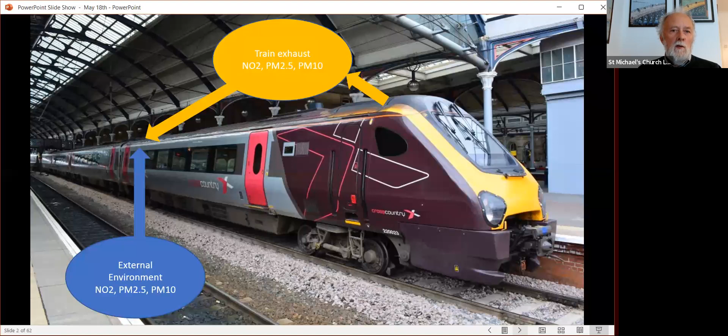If we consider a train and the pollutants around it, obviously it takes in external pollutants from the environment, and the ones of interest are nitrogen dioxide and particulate matter, usually defined as particulate matter less than 2.5 or less than 10 microns. So that goes into the air conditioning system. It also produces its own exhaust, similarly NO2, PM2.5 and PM10, which can again be entrained into the air conditioning system. So this set of pollutants comes into the cabin, where it's joined by pollutants from people.

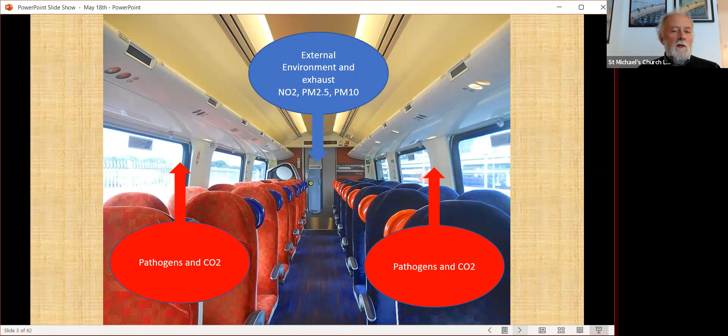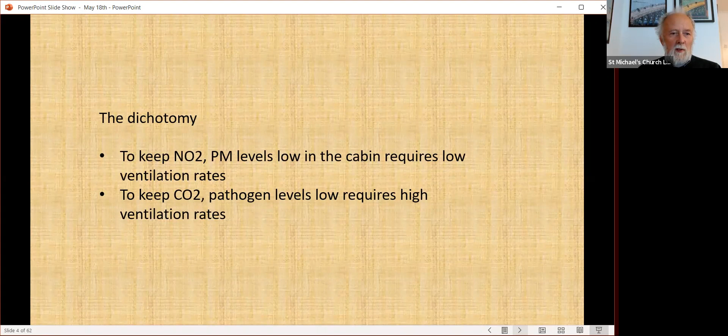These are mainly CO2 from the breathing process, but also pathogens, potentially during any time of infection. And of course there's a dichotomy here: to keep pollutant rates low in the cabin requires low ventilation rates to stop them coming in from outside, but to keep CO2 and pathogen levels low requires high ventilation rates. So there's something of a contradiction, and that's largely what I want to talk about in what follows.

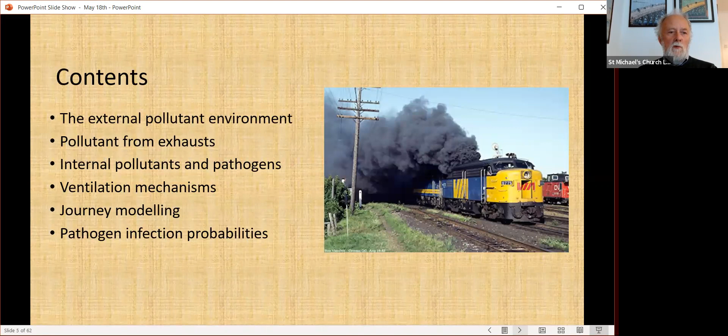I'll talk first of all about the external pollutant environment, then about pollutants from exhausts, then about internal pollutants and pathogens, ventilation mechanisms, journey modelling, and finally look at pathogen infection probabilities.

So, the external pollution environment. This is by way of background. The pollutants of concern, as I've said, are the oxides of nitrogen, particulate matter PM10 and PM2.5. The areas of concern are in enclosed stations where levels of those pollutants can be high, or in inner city areas, or in tunnels.

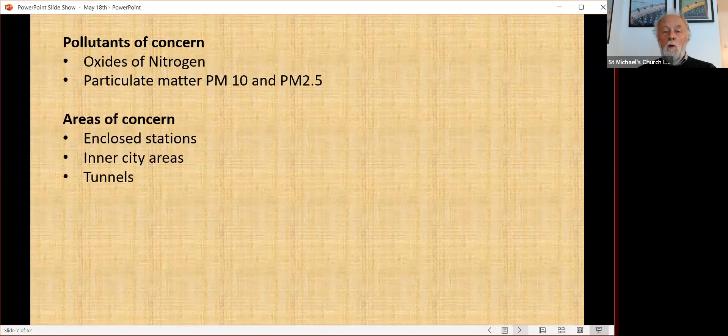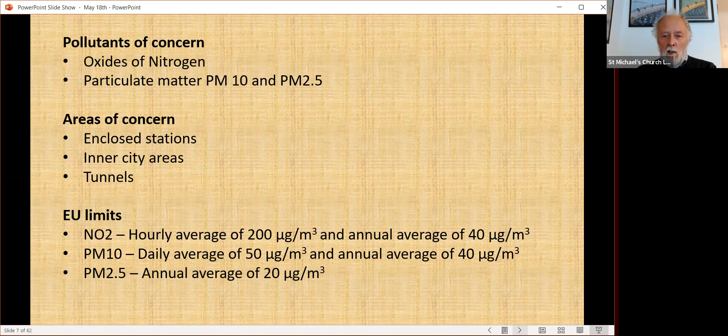For information, the current EU limits on these pollutants, which don't apply to the transport industry at all but are indicative: the hourly average of NO2 shouldn't exceed 200 micrograms per meter cubed more than a certain number of times in a year, and the annual average shouldn't exceed 40 micrograms per meter cubed. For PM10, the daily average is 50 micrograms per meter cubed with an annual average of 40, and for PM2.5, an annual average of 20. Keep those figures in mind, as they'll give context to what follows.

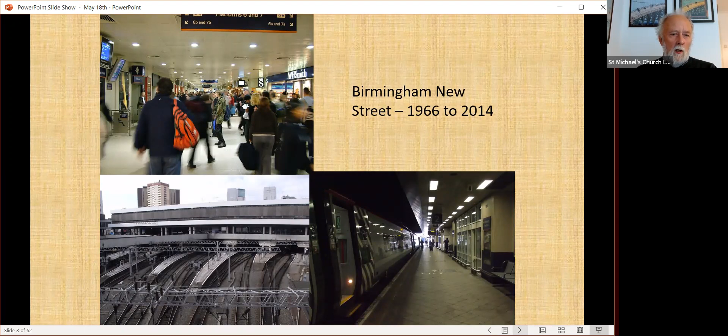Thinking about external pollutants, we did some work in 2016 at Birmingham New Street station, which was rather a dark and depressing station in its old format up to 2014, before it was replaced by the new station. Network Rail and the University of Birmingham took the opportunity to make pollutant measurements at platform level at that time. These have been widely reported, so I'm not going to talk in detail about them.

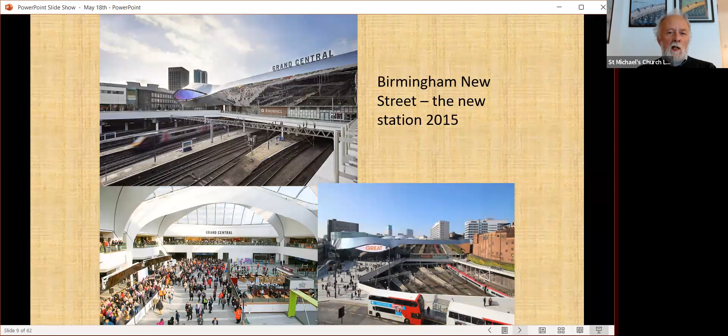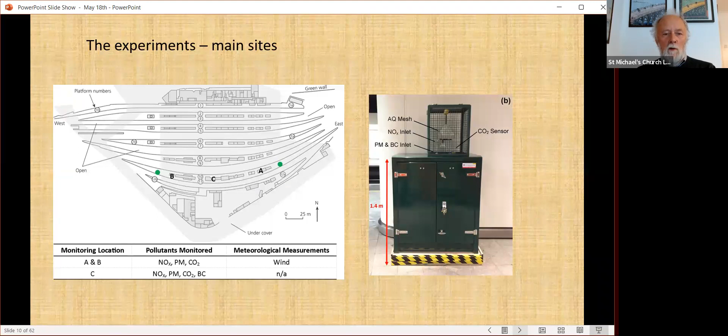In essence, we made detailed measurements of NO2 and particulates at a number of sensors along one of the platforms, as well as wider measurements across the station. I plot here the concentrations of nitrogen dioxide and the particulates across the course of the measurements at the end of 2016, start of 2017.

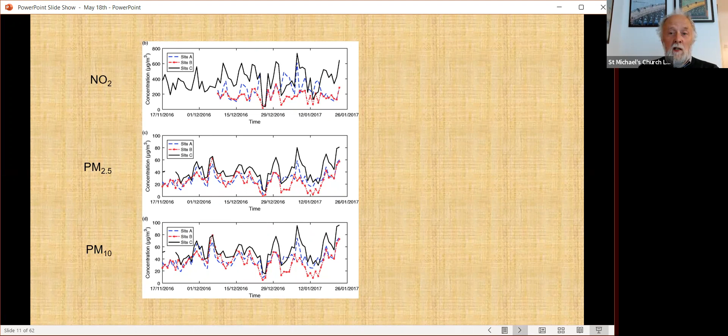If you think about those limits I just talked about, 200 micrograms per meter cubed for NO2 and between 20 and 50 for PM10, you can see they are quite significantly exceeded for many periods during the measurement period. Some interesting points on that graph, where I've just shown the shading, is the Christmas period when there are no trains, and you can see pollutant levels go very low.

Similarly, a period in January 2017, there was quite a significant wind blowing through the station. The highest levels were, frustratingly, just as we were packing up the equipment, in a period of almost no wind conditions. So even in a fairly enclosed station such as Birmingham New Street, there were significant meteorological effects.

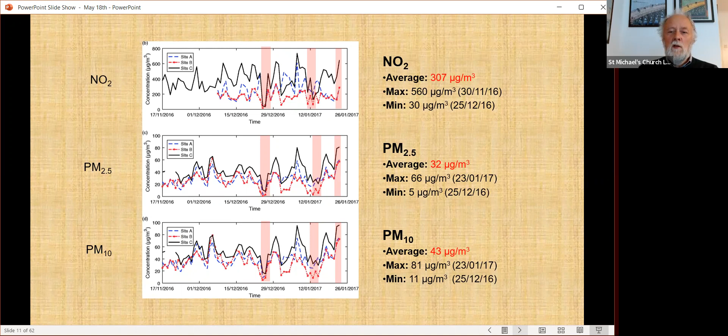We also looked in more detail at the effect of different trains on the platform, and here are minute averages shown for the nitrogen dioxide pollutant during the course of one day, when the presence or otherwise of various types of diesel train is indicated. There's not really much correlation between the actual train in the platform and the overall pollutant levels. The pollutant seems to mix very rapidly within the station.

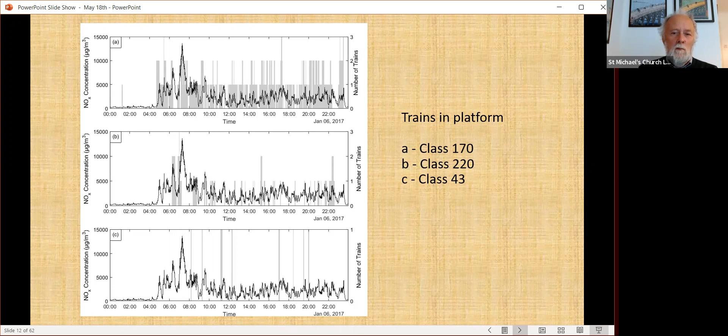On the basis of this study, further work was done by the Rail Safety and Standards Board through King's College London, who measured pollutant levels in Edinburgh Waverley Station and London King's Cross as well. Those pollutant levels are shown on the x-axis of those graphs for the three stations, and the red lines show the limits. Birmingham New Street, in its old incarnation, can be seen to be worse than the others, although nitrogen dioxide levels are actually exceeded at the other stations as well.

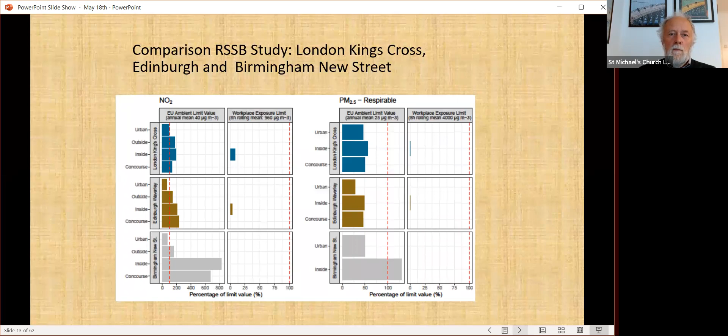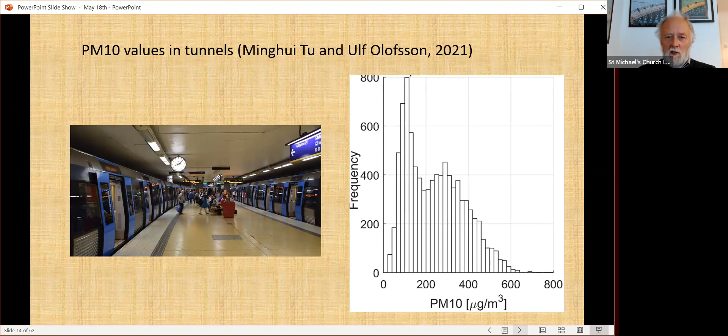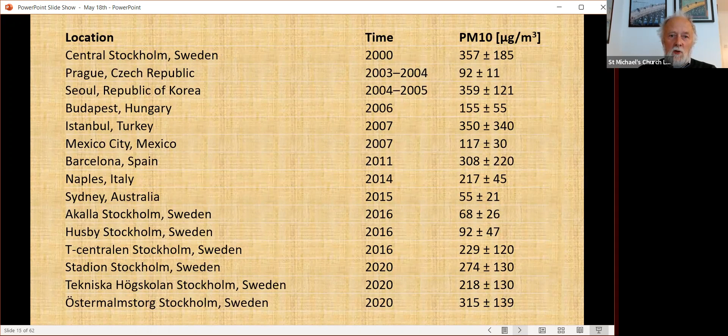So that says a little about external pollutants in stations. There have been some recent measurements made of PM10 levels in a range of tunnels in Sweden, and the results can be seen in histogram form. When we compare those to the limits of 20 or 50 micrograms per meter cubed, we can see very major exceedances indeed, because of the dirty particulate environment within tunnels. A collation of data from around the world tells us the same story, with very high pollutant levels within tunnels.

In principle, the external concentration can be described as some function of train location and time—concentration as a function of x and t.

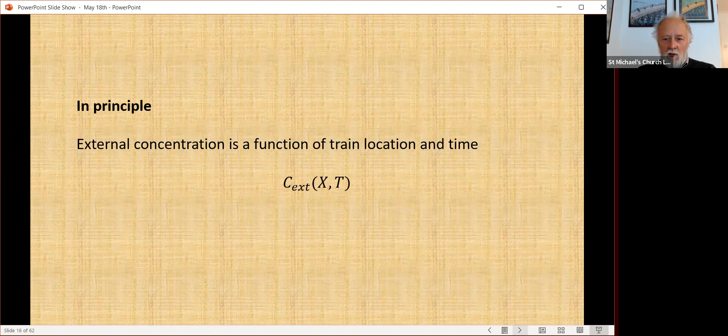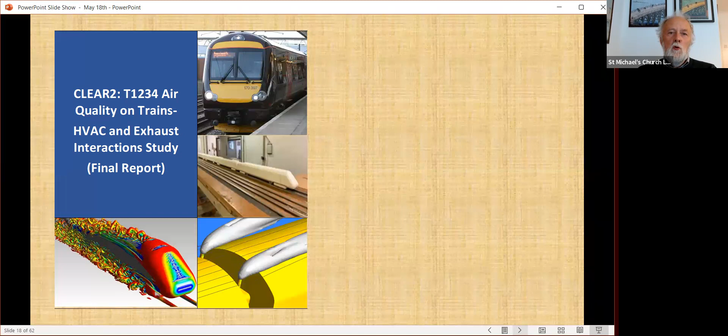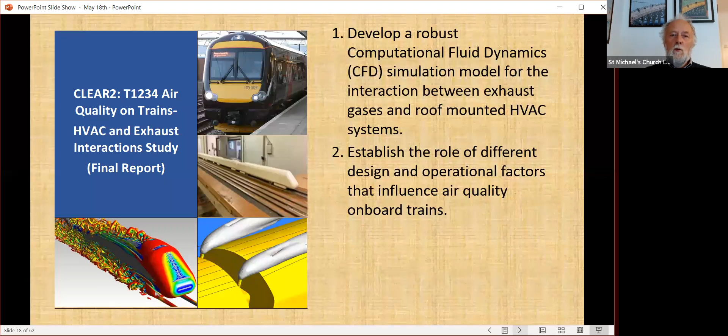Now we move on to pollutants from exhausts. I'll talk about some recent work we've done with the Rail Safety and Standards Board, looking at how pollutants were drawn from the exhaust into the air conditioning system. CFD modelling was used to measure that interaction, examine the role of different design and operational factors influencing air quality on board trains, and develop a methodology for using CFD in this kind of analysis in future.

To produce a workable tool, there's a real need to use simple RANS modelling rather than more complex DES and LES. The question really is: is RANS modelling good enough?

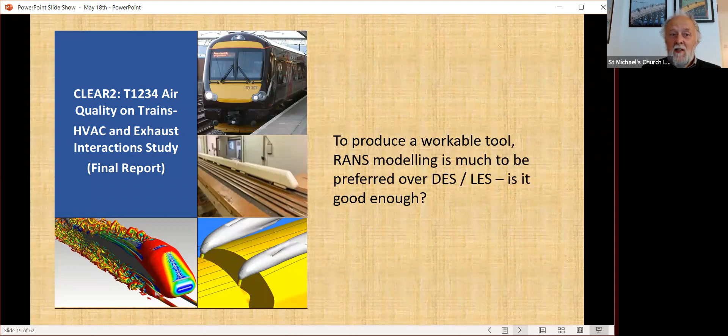We compared RANS modelling with LES modelling for a configuration of a 4-coach train. You can see where the exhaust pipes are. We look at the pollutant levels predicted by LES and RANS at lines 1, 2, 3 and 4. The further we go from the exhaust, the more spread out the LES results become, simply because they reproduce turbulence accurately, and the overall average levels are much lower than the RANS levels.

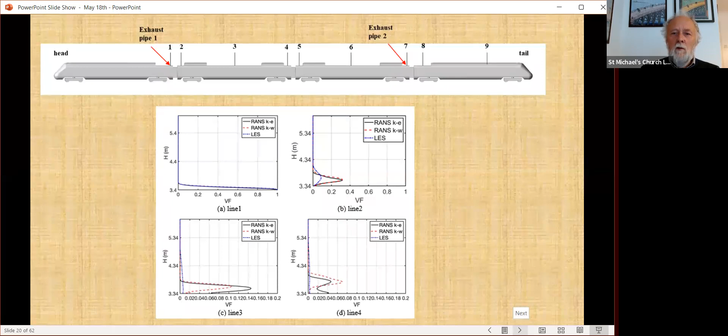However, looking at the results in detail, we concluded that RANS levels are quite good approximations to the maximum LES values when the LES plume is above the HVAC inlets at the lines under consideration—so a workable tool for looking at the highest levels of pollutant intake.

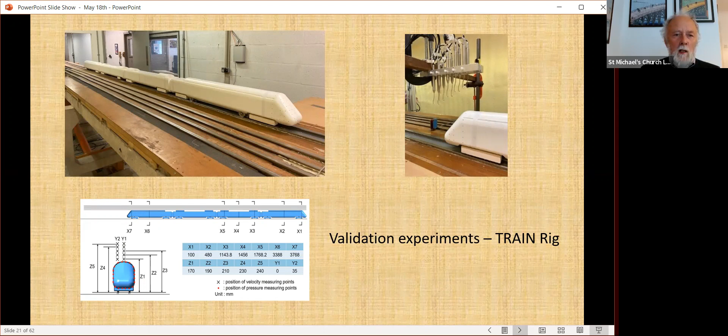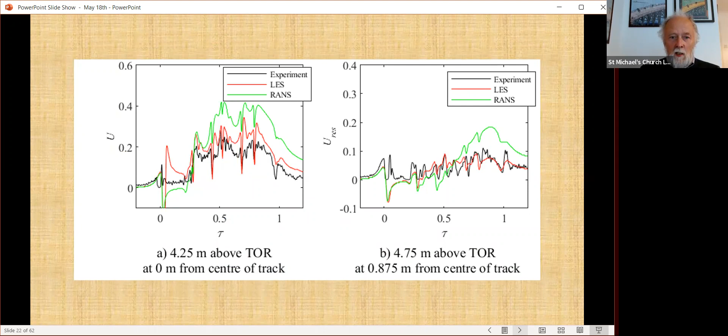We validated these on the moving model train rig, measuring velocities over the top of the train. Here we show ensemble averages of train velocities over the top, comparing experiment, LES and RANS. LES is again the best, but we concluded that RANS was probably good enough.

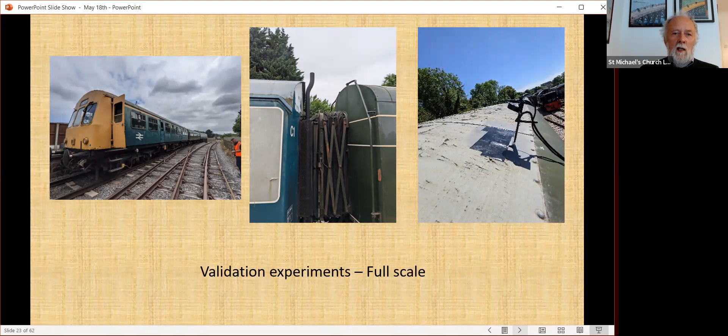We also made measurements at full scale on a heritage railway near Derby. We released pollutants from the exhaust into the airflow above the train and measured concentrations downstream. Oddly, at first we found concentrations were higher further from the exhaust—counterintuitive, but it was picked up by the CFD. What's actually happening is the exhaust plume is mixed and brought down to roof level some significant distance from the exhaust itself. So this offered a broad validation of the methodology.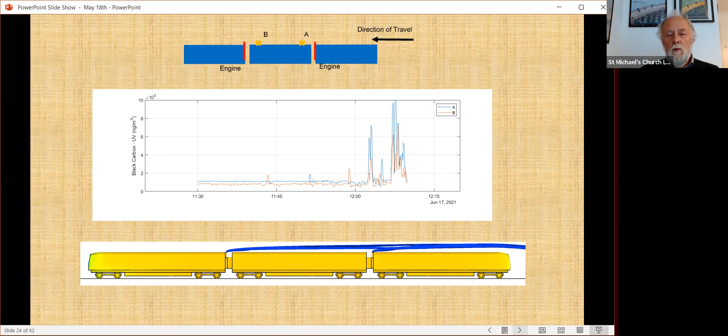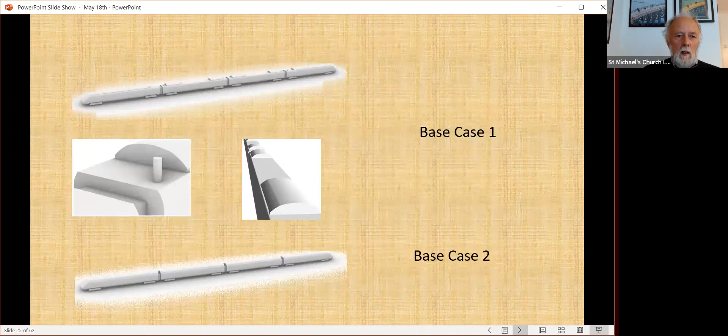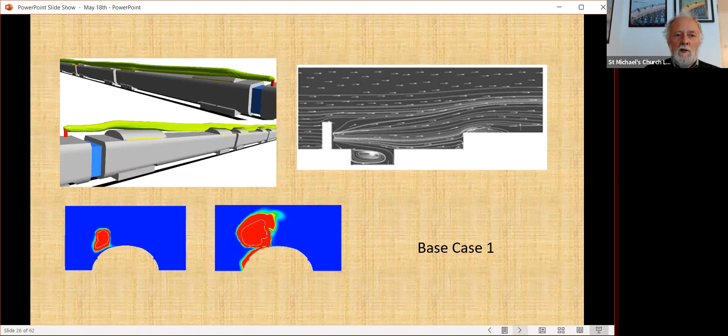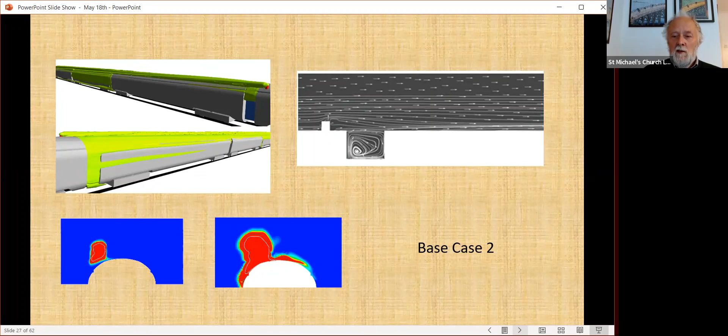In a more detailed test, we looked at two base cases: one train with a rough roof, and one, base case 2, with a smooth roof. For the rough roof, the plume was pushed away from the train roof near the exhaust by the flow disturbance from the roughness discontinuities. But for base case 2, the pollutant came down almost immediately onto the roof and spread along it. Here we show the concentrations at the various HVACs down the train—HVAC 1 is the first HVAC on coach 1, and so on.

For the rough roof case, shown by the circles, and the smooth roof case, shown by the triangles, you can see the higher levels for the smooth roof case.

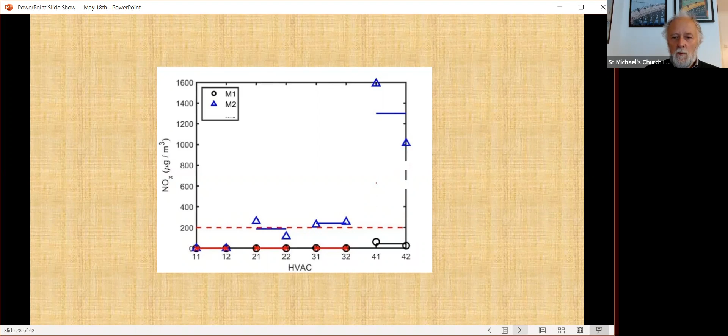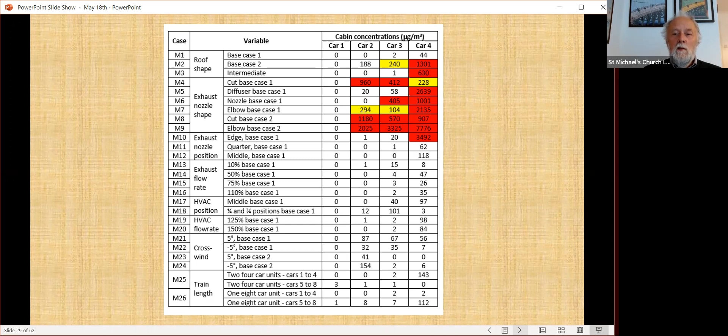We then ran many experiments varying different geometric parameters, and found the highest levels were generally at the rear car, with roof shape and exhaust nozzle shape being the factors that most affected whether levels were high. That said, results are very sensitive to parameter choices, and any new train design would need its own separate investigation—but we now have a proven methodology.

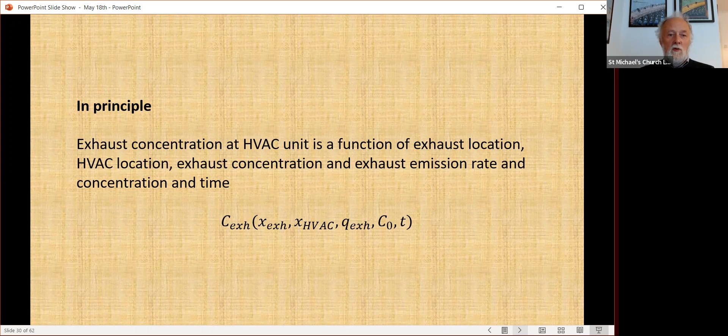So again, in principle, the exhaust concentration at the HVAC is a function of exhaust location, HVAC location, exhaust concentration, exhaust emission rate, and time.

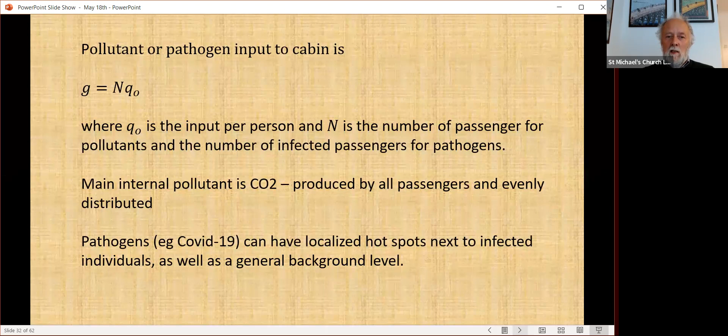Now, very briefly, consider internal pollutants and pathogens. The input to the cabin is simply given by the number of passengers—either the total number of people for carbon dioxide, or the number of infected passengers for pathogens. CO2 is produced by all passengers and is quite evenly distributed, whereas pathogens such as COVID-19 can produce localized hotspots as well as a general background level.

So those are the different pollutants. What are the ventilation mechanisms that move these pollutants around?

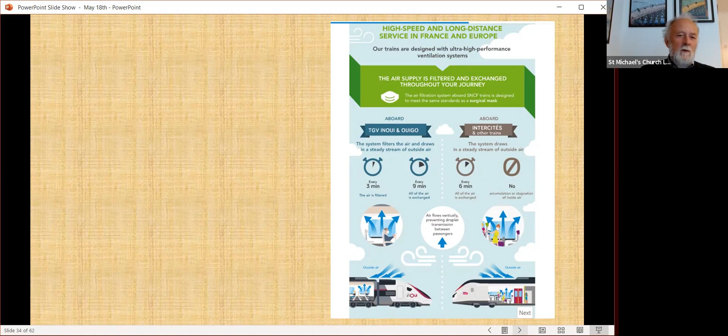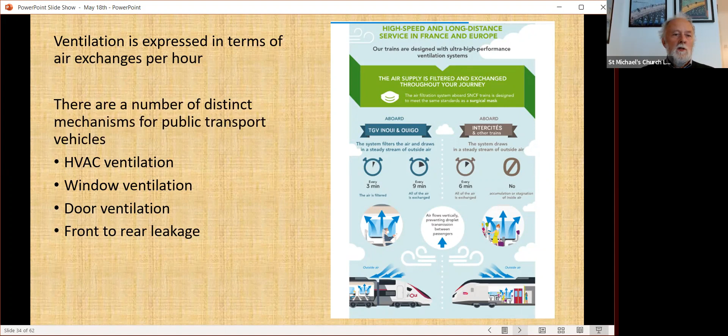Ventilation is expressed in terms of air changes per hour, and there are a number of distinct mechanisms: HVAC ventilation, window ventilation, door ventilation, front to rear leakage, which is particularly important for buses and coaches, and leakage through the envelope.

HVAC ventilation is mechanical ventilation, and the air changes per hour are simply a function of how efficient the HVAC system is and on the volume of the cabin. In trains and buses, one would normally be aiming for air changes per hour due to HVAC of the order of 8 to 12.

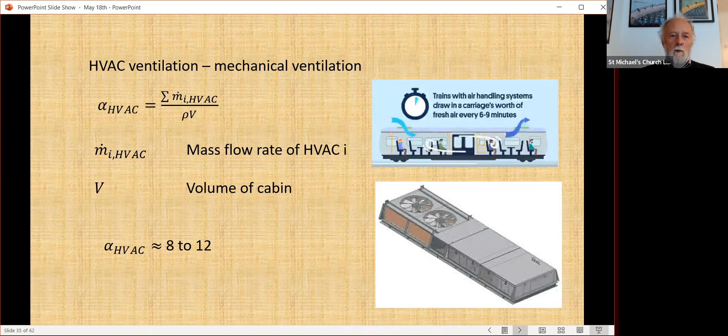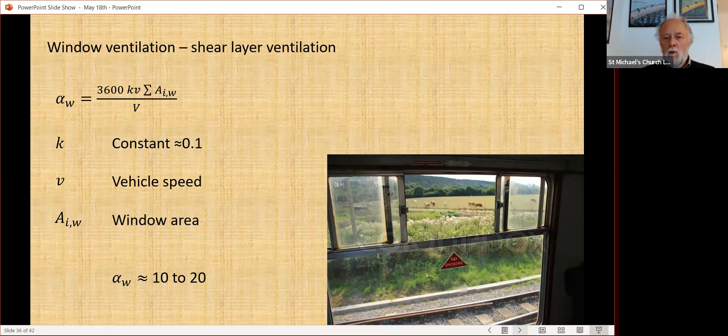For window ventilation, we have what's called shear layer ventilation, where the flow is driven by the shear layer passing over the open window. The formula we use here is based upon some building ventilation measurements I was involved in almost two decades ago, which says that the ventilation air changes per hour is proportional to the opening area and the speed with which a train is moving. Putting in some numbers, for open windows, air changes per hour are between 10 and 20, which seems to match with experience.

Similarly for doors, although the correlation is less certain here, we use the same sort of correlation, but assume it's driven by a wind speed across the door when the door is open. That gives us air exchange rates of the order of 11, but this is only for the very short time that the doors are open, of course.

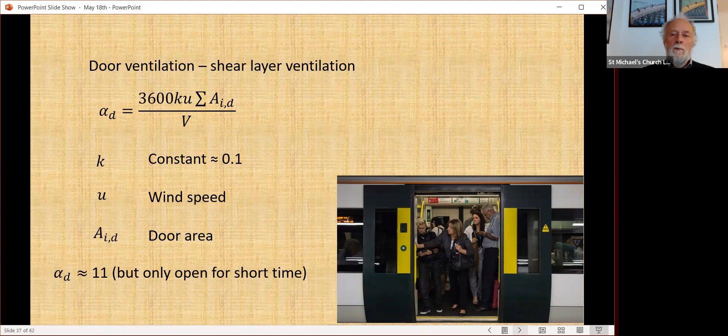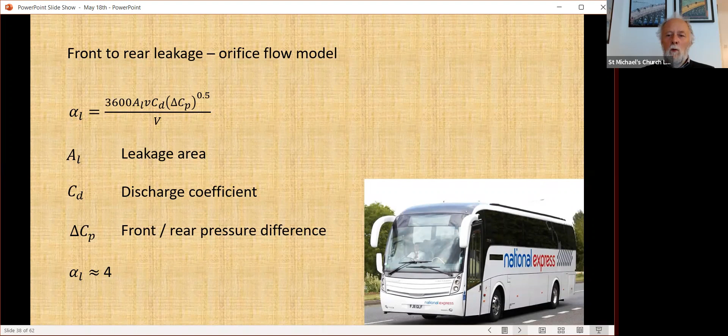For buses and coaches, there can be pressure-driven ventilation from front to rear, for which one can use a standard ventilation orifice flow model, driven by the pressure difference. That gives ventilation rates of the order of 4 air changes per hour.

Finally, there's ventilation due to envelope leakage, which is very important for pressure sealing considerations in tunnels. That's driven by the difference between the internal and external pressure, with the main parameter being the leakage time constant. Putting in some numbers gives a very small ventilation rate of only 0.1 air changes per hour, so for the situation under consideration here, it's not really terribly important, and we won't consider it further.

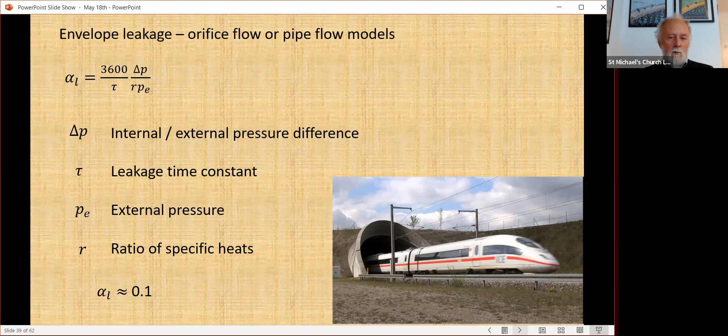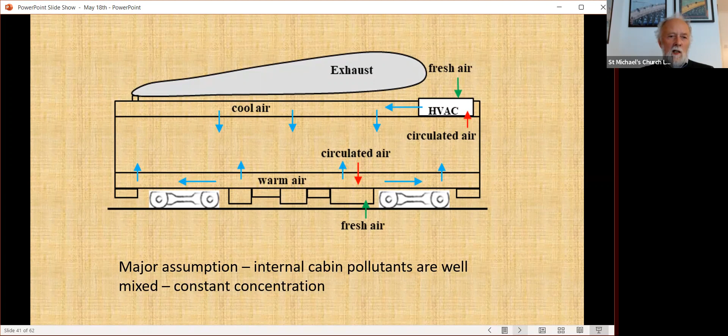Okay, now where do we go from here? Having looked at the pollutant levels and the ventilation models, it seems to me that it would be far more efficient than the rather generalized imposition of restrictions that went on during the current pandemic to try to model individual journeys and find out when both pollutants and pathogens can have high levels. So I set up a very simple model of the concentration of pollutants in rail or bus cabins due to the different types of ventilation, perhaps allowing for circulated air and for some degree of cleaning of the air.

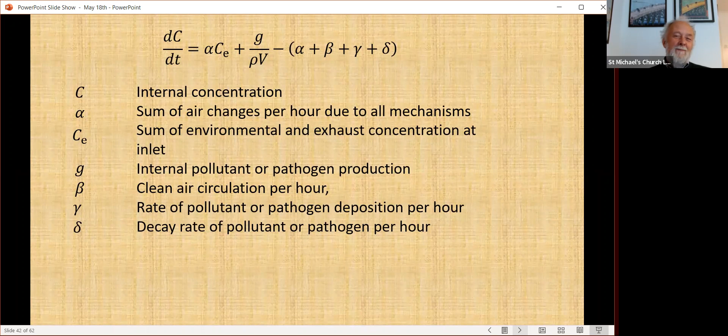We have a very simple equation, used by many people in some form or other, that says the rate of change of concentration is proportional to the air changes per hour multiplied by the external concentration, plus an internal pollution or pathogen term, and then a term that allows for the air changes per hour, the clean air circulation per hour, the rate of pollutant or pathogen decay, and deposition per hour. A very simple equation.

We then apply that to specific situations. I consider first a rail route, where we start in an enclosed station, go through a series of tunnels and urban stations, out into a rural area with rural stations.

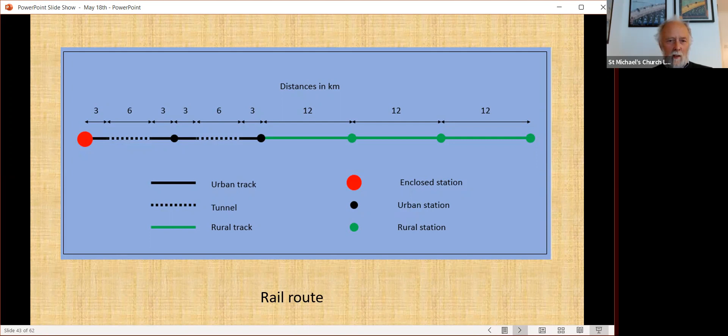At each of those stations, I specify a set of pollutant concentrations. These are high in what one might expect to be polluted areas, in tunnels and inner city stations, and low in other areas.

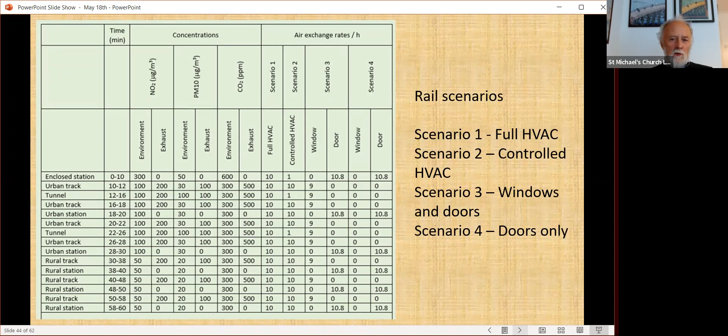I then specify a number of different rail scenarios: full HVAC operation, controlled HVAC operation which turns the HVAC off when you're in polluted areas such as train stations and tunnels, and windows and doors only. If you look at them, there are some interesting points.

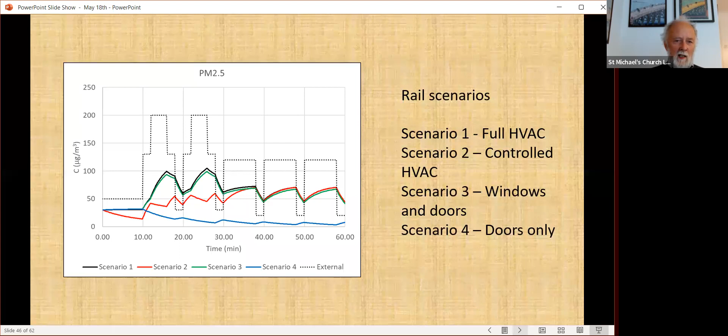Similar sorts of figures really for PM10 and PM2.5. For CO2, which is, remember, an internally generated pollutant, things are a little different. Here the highest levels are for scenario 4, the most enclosed of the scenarios, where the high levels are kept in, and the lowest levels are for the other scenarios, in the rural areas, with some peaks for scenario 2, the controlled HVAC, when the HVAC is turned off in the tunnel areas near the start of the route.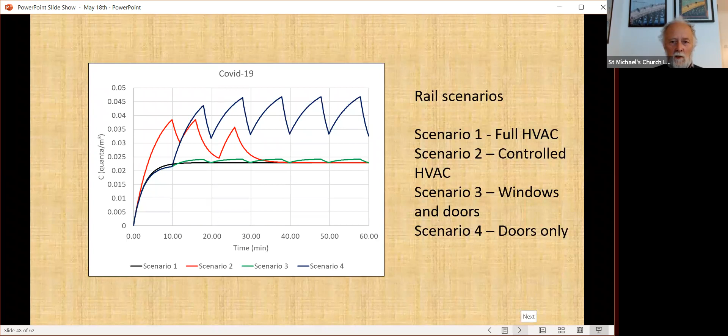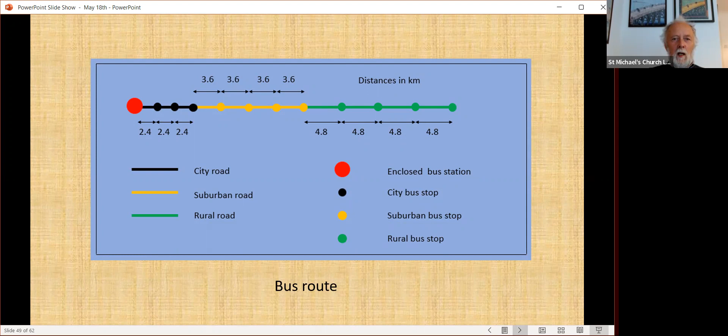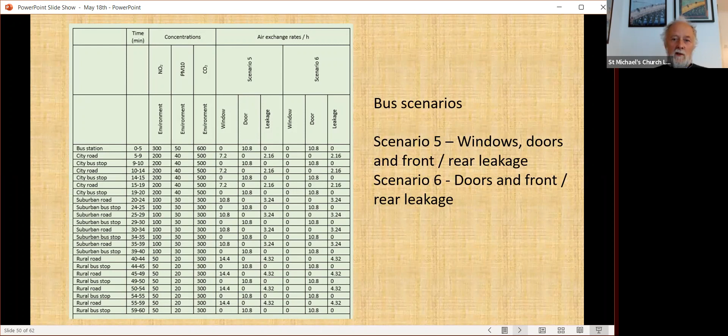We also did a similar thing for a bus route, again going from a bus station in a city area along city roads, suburban roads, urban roads, and rural roads. There again, I defined a number of scenarios. Scenario 5: windows, doors, and front-rear leakage, so leakage for ventilation from having all windows and doors open, and also the leakage back to front. Scenario 6 is having the windows shut, as one might expect during less clement weather.

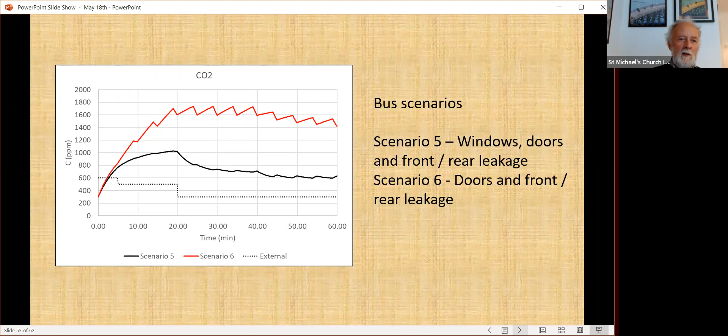So when we put all that together and calculate the average values for the journey for each of those 6 scenarios, we see that the highest values for the nitrogen dioxide and for the particulates tend to be for those scenarios where it's actually quite well ventilated. Not wholly, but mainly. For CO2 and for COVID, the highest values are particularly for the less well ventilated cases, when the pathogens or CO2 build up during the course of the journey.

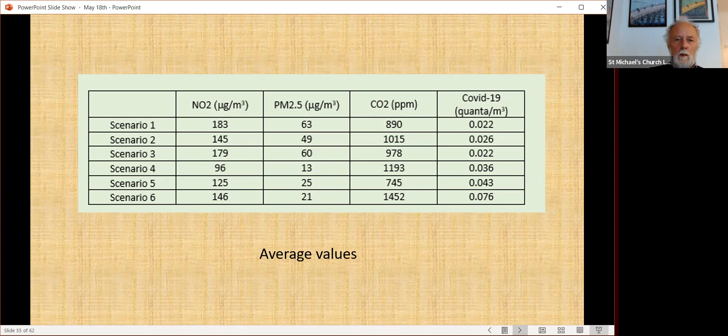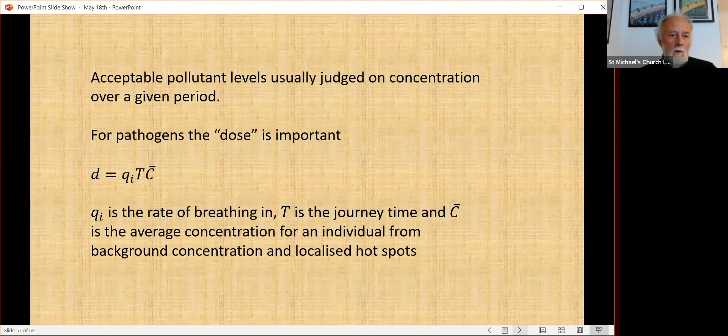So we go on from there now to think specifically about pathogens, and in particular infection probabilities. For infection probabilities, the dose of the pathogen is important. And the dose is basically the rate of breathing in, multiplied by the journey time, multiplied by the average concentration. That can come from an individual, from background concentrations and localized hotspots.

There's a fairly standard formula that allows for this, that allows one to calculate the probability of infection, that relates the dose D to the population probability of infection, little p, to the fraction of people who are immune, F sub I, and to the wearing of masks, the fraction of people wearing masks, and the mask breathing out and breathing in efficiencies. K there is a factor that allows for pathogen variants. If it were 1 for the initial COVID variant, it will be of the order of 10 for the Omicron variant.

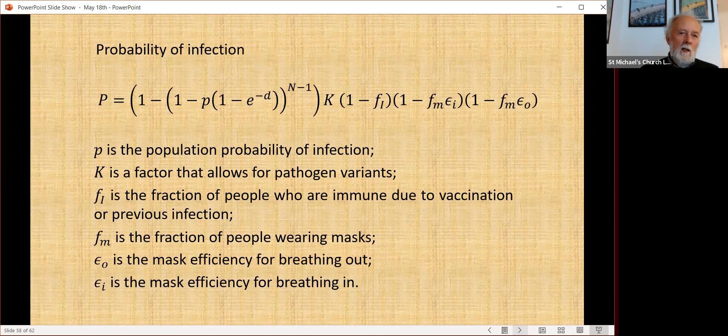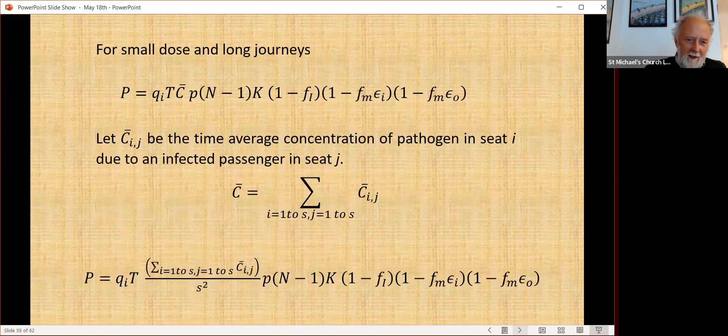That can be simplified for small doses and long journeys to a nice linear expression. The average concentration there is the time average concentration of pathogen in seat I due to an infected passenger in seat J, summed over all pairs of I and J. And it gives a relatively simple formula at the end.

Getting that rather complex looking average concentration, one might think, is difficult, but actually there's been some very interesting recent work by Lee et al., just published in 2022, who looked at the spread of pathogens, carbon dioxide, from every individual in a carriage using CFD, and they were able to describe where people's breath went and who inhaled whose breath. In other words, they effectively gave that concentration matrix Cij. Very nice piece of work indeed.

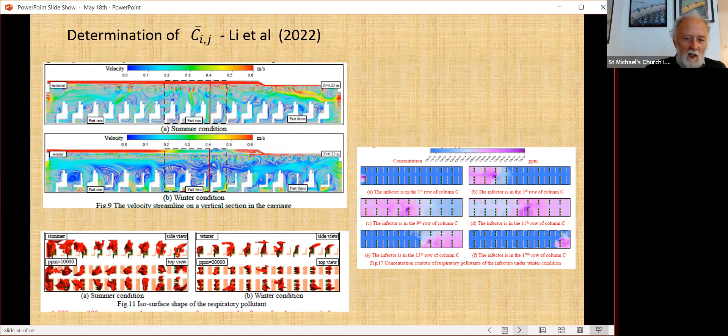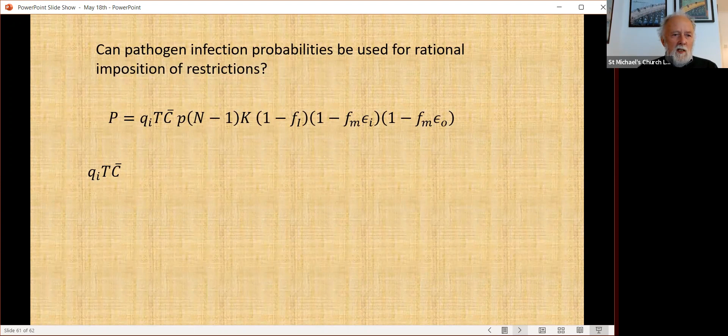So, can pathogen infection probabilities be used for rational imposition of restrictions? Well, what we have there, that final expression, Q I T C bar, that's basically all about the journey and about the passengers. And you can calculate that, that's fairly general.

P K times (1 minus FI) is something about the state of the epidemic or pandemic. The P is the infection probability, FI is the level of immunity. And the last term is all to do with social distancing, the number of passengers in the vehicle, and the effect of mask wearing, the mask terms there.

And you see that expression there allows one to specify fairly rationally a parameter P, an infection probability, what is acceptable. And then to say, well, that may increase or decrease during the state of the epidemic. The absolute levels are going to be controlled by the journey, by T and C.

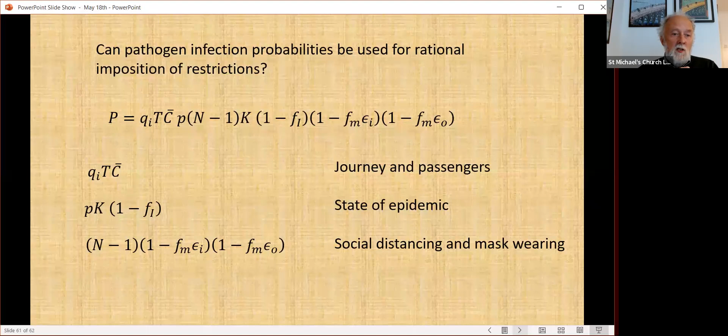But as the probability, as the state of the epidemic changes, and so P and FI change, one could also make changes to N, the number of passengers, and whether or not one enforces mask wearing. And it gives potentially a rational way of bringing in restrictions that can vary through the course of the pandemic to keep the infection probabilities something around the same.